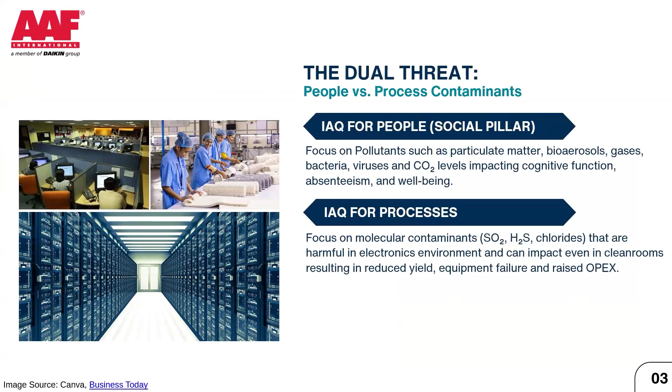Mostly we see it because people respond to this immediately, with maybe coughing, sneezing, headache, or other symptoms that people immediately get affected by. But it also affects the processes and the equipment inside indoor spaces, which are also more critical. And then how it can be avoided, and how we can get a comprehensive strategic IAQ plan to protect humans as well as the assets and the processes we are doing inside the facilities.

So when we talk about the particles or the PM levels, they are more visible or more dangerous, and there are also other contaminants, specifically the molecular ones, which are at very tiny levels compared to particles, at molecular sizes, not easily visible. Some don't even have odor, but they keep affecting the occupants or the processes inside the facilities.

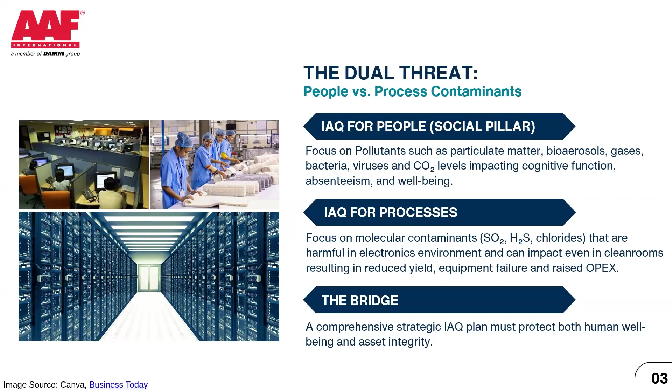So when we talk about ESG, it's not only about energy efficiency, energy saving, or reducing carbon emissions, but even how we can work with filtration solutions which can reduce energy consumption. Like Mr. Anil was explaining, you always have better options available, and don't just focus on the initial cost of the filters, but on the total cost of ownership, what is going to be paid in terms of hidden costs like energy consumption or electricity cost.

Then, in terms of the social part, how we can protect our workforce, the human capital, how their productivity can be improved, how their wellness can be taken care of. And in terms of governance, the transparent monitoring and display of IAQ levels inside the facilities. Also complying with the local and national norms in terms of emissions, and sharing these reports with shareholders, showing that we are not only monitoring but also maintaining this. This gives a good picture from a governance perspective for any organization.

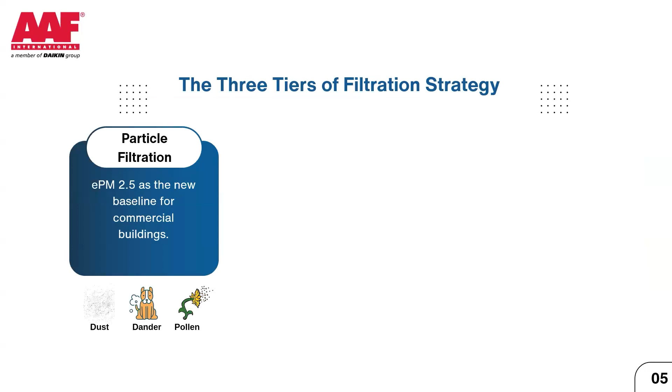So as we move forward into discussions, the three tiers in filtration: we see particle filtration, mostly for dust particles, agricultural waste, pollen, and from humans and pets. Then molecular filtration is required to remove gases, specifically from vehicular pollution, from nearby facilities or industries, as well as some biodegradation happening naturally in the ambient, which also adds to the gases.

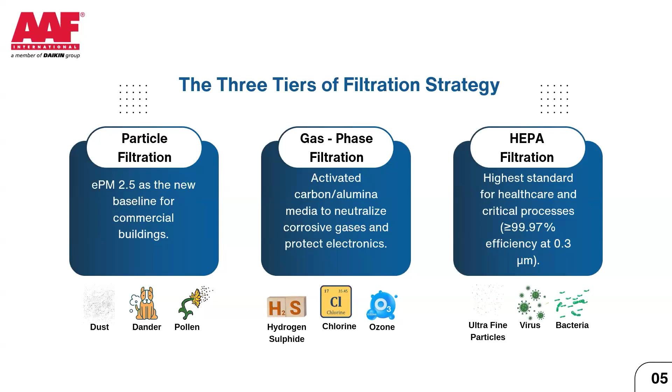And then viruses and bacteria: in certain processes we need to focus on ultrafine particles, where not only dust but even viruses and bacteria can affect the performance as well as the processes inside the facilities. I will quickly run through this because we already spoke about how it enters the body, and as Anilji mentioned, it impacts the reproductive system also, and it's already been researched and shared even in fertility clinics and other applications. The pollution also affects the results of those processes.

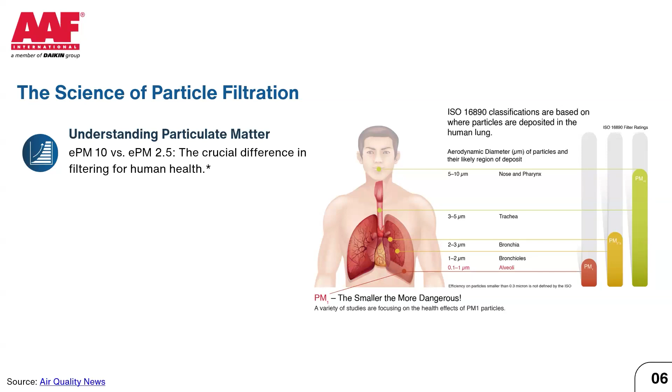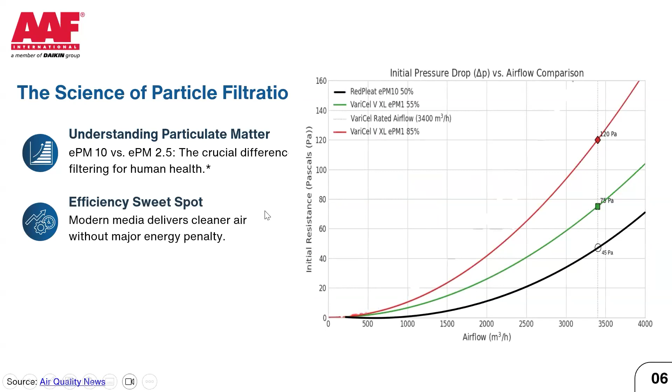So efficiency: this is a graphical representation of how different models with different efficiencies and different pressure drops will help you save more. Then HEPA filters, which are required for certain processes like precision manufacturing or clean rooms, and even for healthcare facilities where we see the threat of infection control.

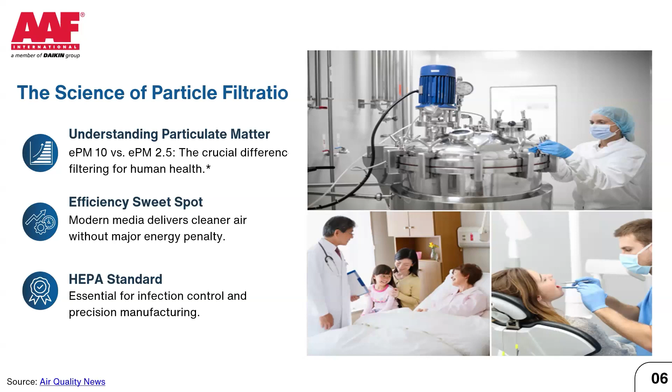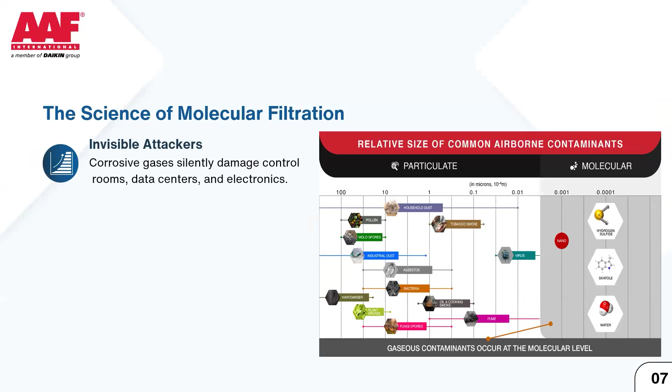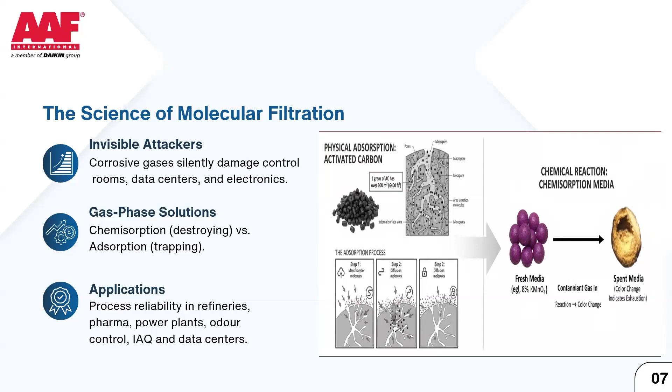So molecular filtration works from a different perspective, where we are talking about gaseous molecules which are not immediately visible, and they keep silently attacking the control rooms, the electronics and other things. It has a different removal technology, adsorption or chemisorption, which needs a different type of filter than the regular pre and fine filters. And it is applicable in pharma or power plants, or in some cases even in indoor air quality and data centers, which are large applications for this type of filter.

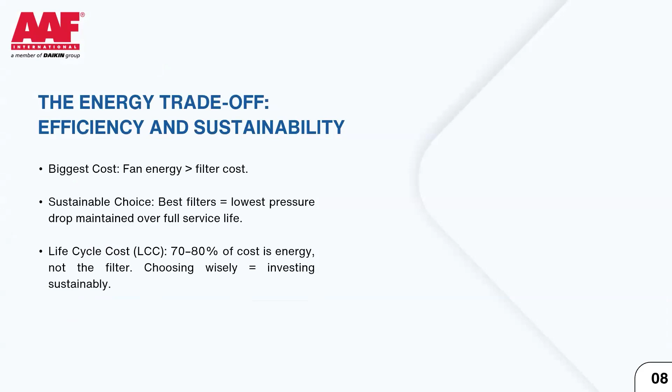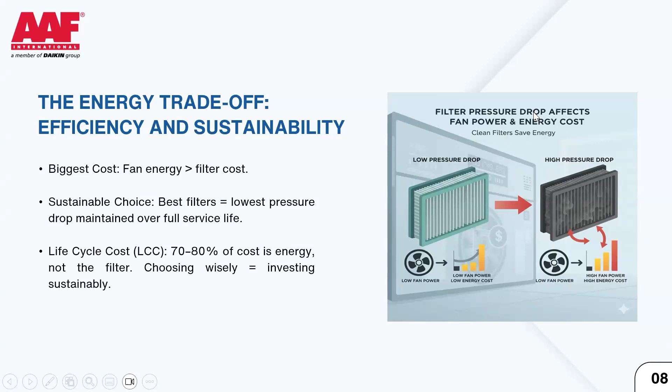So when we talk about the trade-off between efficiency and sustainability, as Anilji was mentioning about the fan energy and the filter cost, what is a sustainable choice, which is having the lowest pressure drop as well as the longer life. So this helps us to select the product in a right manner, where we want to invest less in buying a cheaper product or where we want to save more by buying a good product in terms of energy cost, as well as the effect on the downstream applications, downstream equipment inside the facilities with the wrong selection or with a lower quality or grade of the filters.

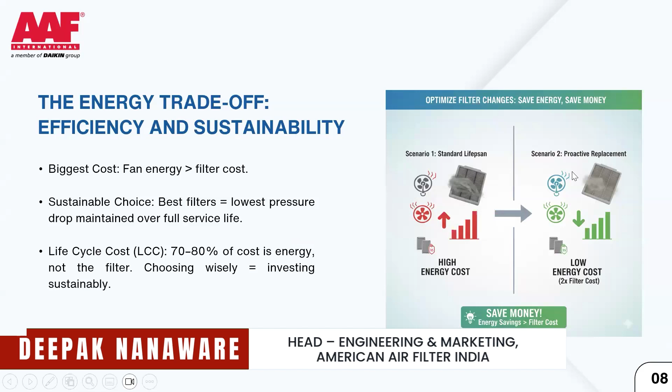So, as we mentioned, in some cases we recommend to replace the filter before reaching the recommended pressure drop, to avoid any damage or breakdown happening. Also, when we operate the filters at a higher pressure drop, it is consuming more energy. So this can also help us to reduce the energy consumption. And at the end of the day, you will be saving a very high amount of money on the energy part compared to the cost of the filters, which is not even 10% of the total cost.

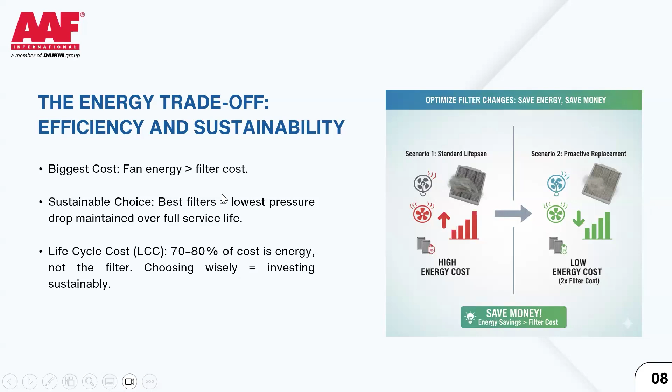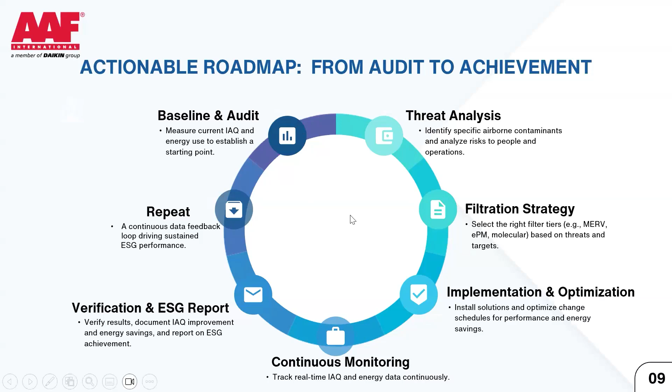So when we talk about ESG, it should not be only what we thought about, but it can be energy, health, and risk. So filters should not be considered as commodities. They are a strategic investment from the ESG perspective.

And then some questions which I would like to add over here: how we can work upon the media. We know about the media with lower pressure drop and other things. But there are certain challenges the industry is still facing about recycling, reducing the carbon footprint, or making it biodegradable to avoid waste generation through the filters. Again, sensor technologies which can be enabled, which can help for reporting purposes instead of collecting data manually and processing it. Then how low we can go in terms of energy consumption, and a longer life, so that it becomes more sustainable.

Then reducing or finding alternatives for the adhesives or the plastics we are using in the products. And then how we can play a collaborative role in setting global ESG-aligned IAQ standards, so that the occupants or the processes inside will be protected as well as reported in terms of the ESG report. For the business leaders: are you considering or reporting IAQ as a part of your disclosures? And do you see it as an OPEX cost or as a strategic ESG investment for the filtration or the IAQ solutions? So that's it from my side.